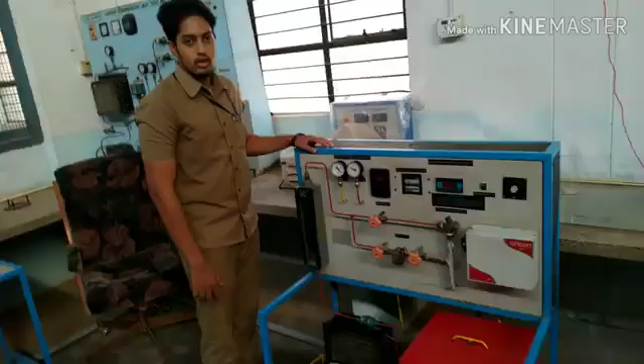Here from VIT College Mechanical Department, I am here to discuss the experiment: refrigeration test bed on vapor compression. Here are the parts of the experiment.

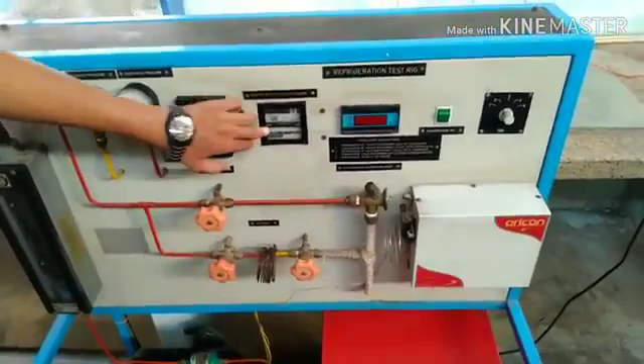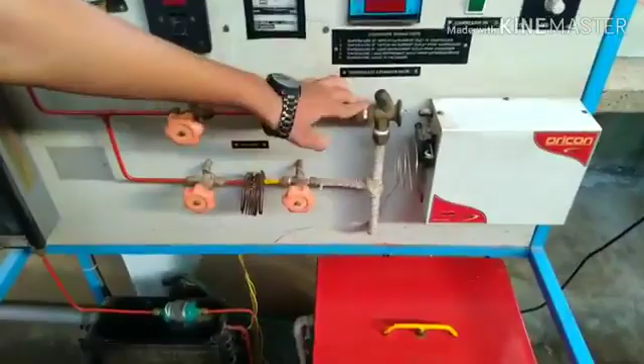Starting with this is the rotameter, and this is the suction pressure gauge, discharge pressure gauge, and this is the energy meter for the compressor. This is a temperature indicator, and this is the compressor valve, and this is the temperature knob, and this is the thermostatic expansion valve, and this is the capillary tube, and this is the condenser, and this is the compressor, and this is the evaporator.

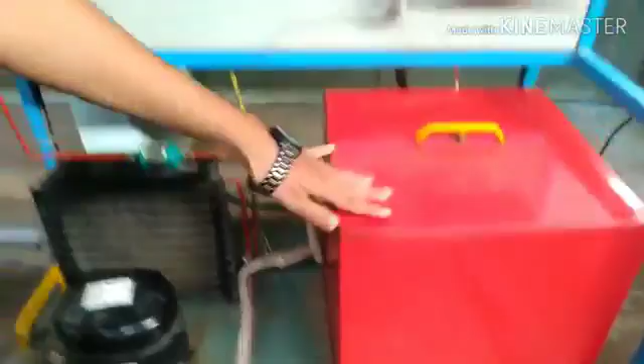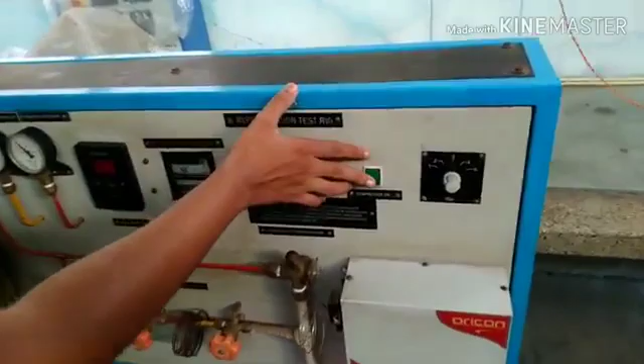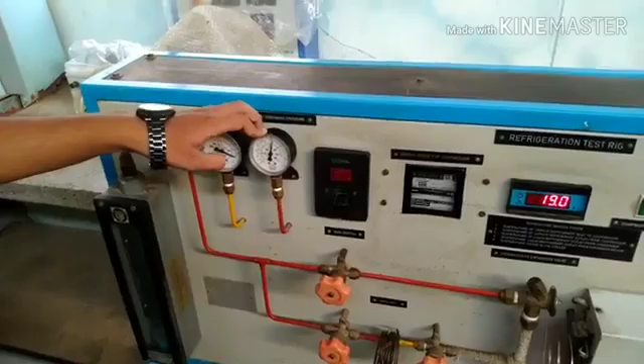Now I will be explaining the working principle of this experiment. First we need to switch on the switch, and then turn on the compressor valve, then wait for 15 minutes for the steady state to appear. Then take down the suction pressure gauge reading, the discharge pressure gauge reading, and the time taken for the energy meter to complete 10 revolutions. Then, turning the temperature knob, take down the temperatures till T1, T2, T3, T4 and T5.

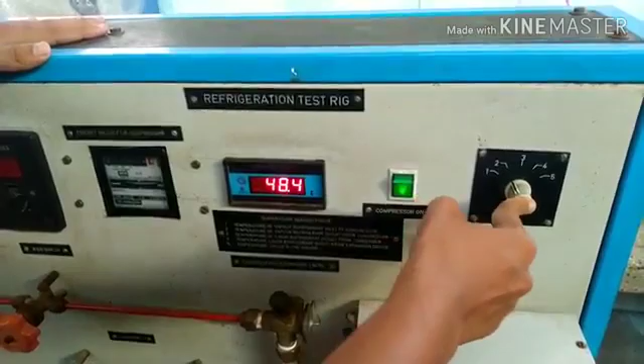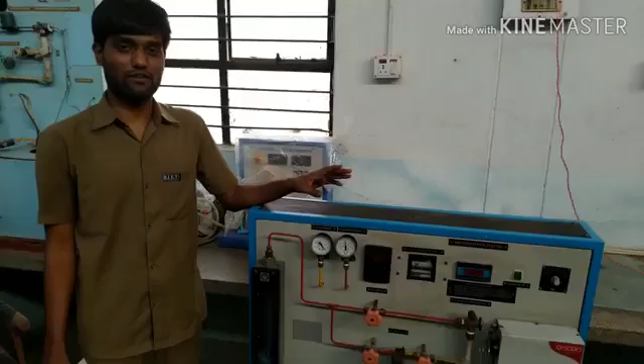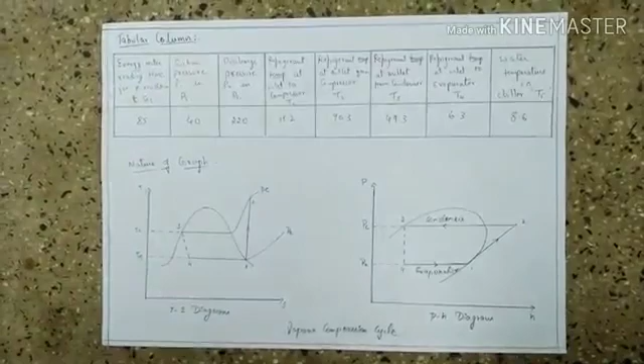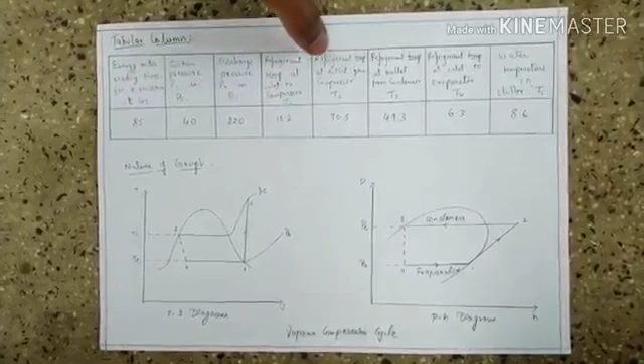So this is the tabular column. First, the energy meter reading time for 10 revolutions is equal to T seconds. Then this is the suction pressure P1 in PSI, and this is the discharge pressure P2 in PSI. Refrigerant temperature at inlet to compressor is taken as T1. Refrigerant temperature at outlet from compressor is taken as T2. Refrigerant temperature at outlet from condenser is taken as T3. Refrigerant temperature at inlet to evaporator is taken as T4. Water temperature in the chiller is taken as T5.

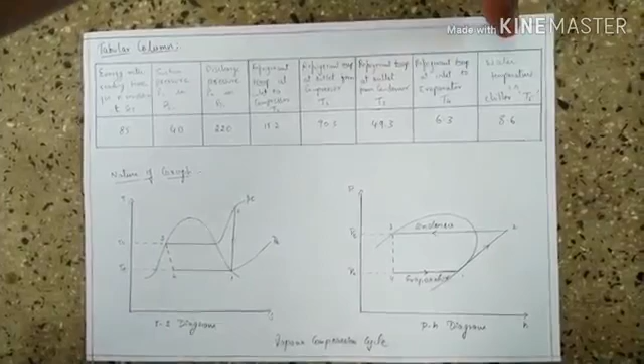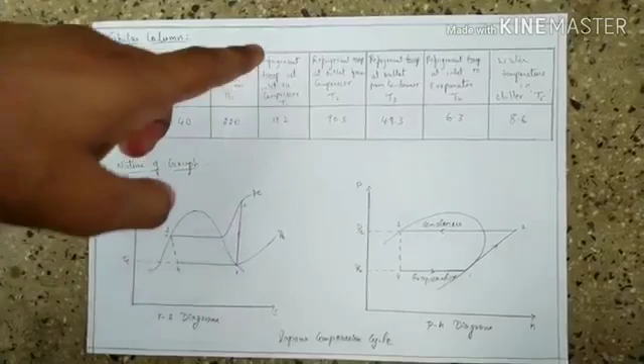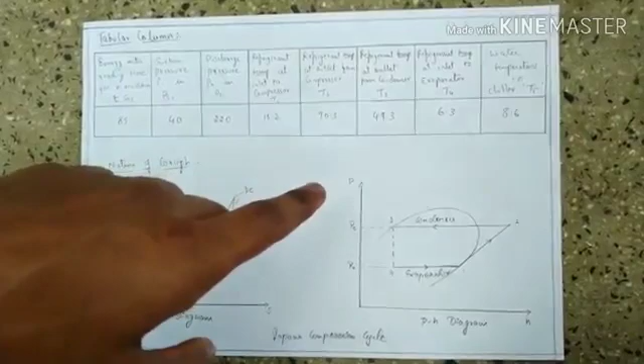So the time taken for 10 revolutions is 85 seconds, and the suction pressure is 40 psi. Discharge pressure is 220 psi. Refrigerant temperature at inlet to compressor, T1, is 15.2, and T2 is 90.3 degrees Celsius. T3 is 49.3, T4 is 6.3, and T5 is 8.6 degrees Celsius.

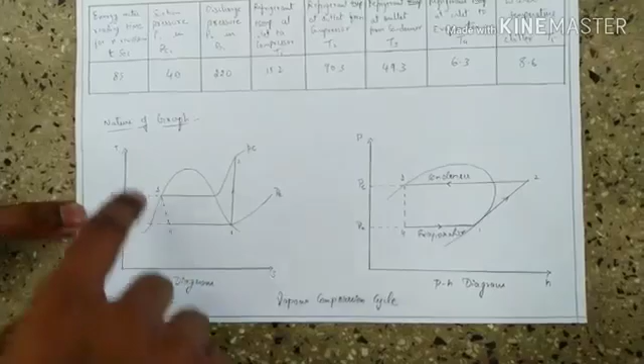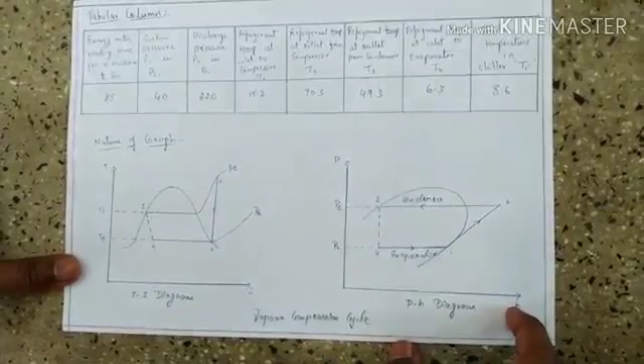Here we have the nature of the graph. This is the TS diagram, where y-axis is represented by T and x-axis is represented by S. This is the PH diagram, where y-axis is represented by P and x-axis is represented by H. Here this line gives the condenser temperature and pressure, and this is the evaporator.

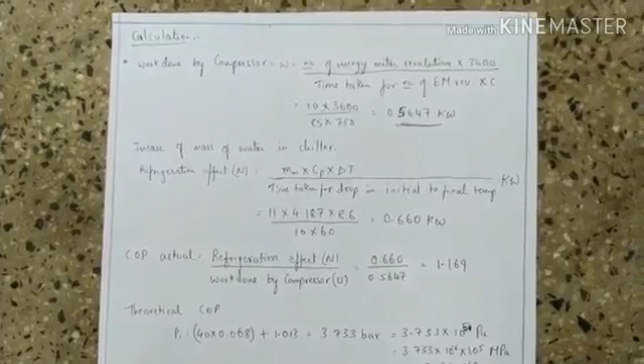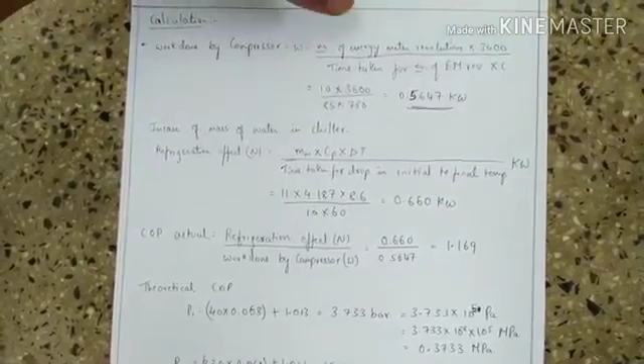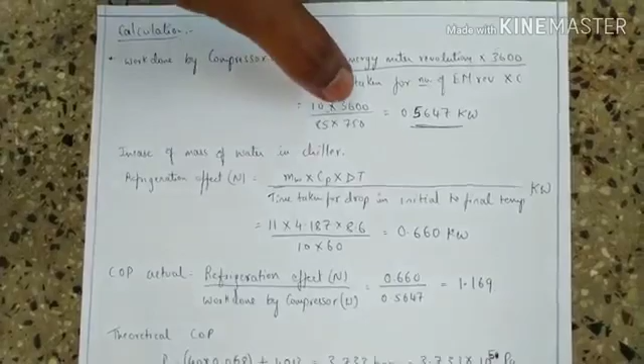Now coming to the work done by compressor, represented as W, equal to number of energy meter revolutions into 3600 divided by time taken for 10 revolutions of energy meter into C. The number of energy meter revolutions is 10, multiplied by 3600, whole divided by time taken for 10 revolutions, which is 85 seconds, and C value is 750. When we calculate this, we get 0.5647 kilowatts.

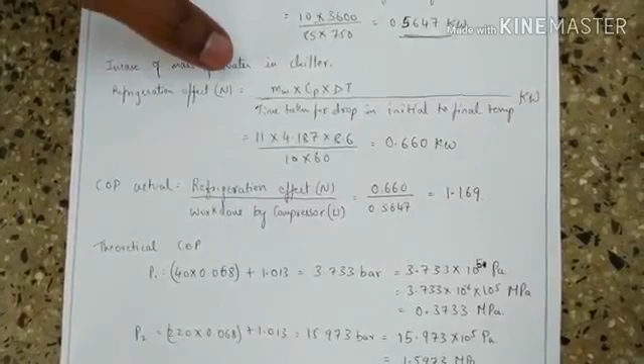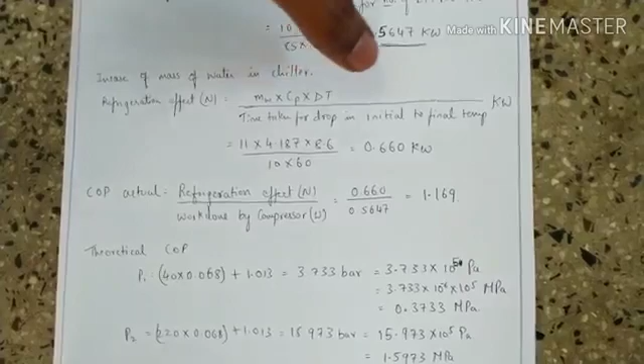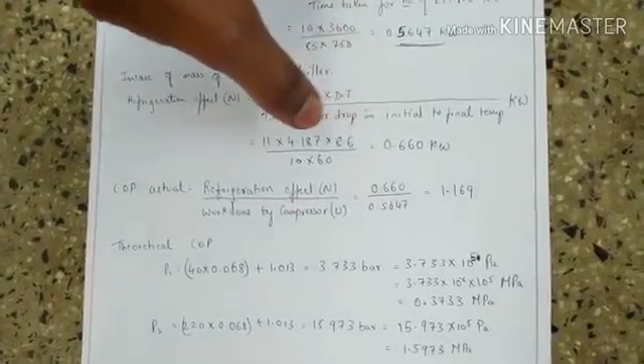Coming next, in case of mass of water in chiller, the refrigeration effect is represented by N, and the formula is MW (mass of water) into CP (specific heat) into delta T (temperature difference), whole divided by time taken for drop from initial to final temperature, with SI unit kilowatts. The values are MW 11 into CP 4.187 into delta T 8.6, whole divided by 10 into 60. When we calculate this, we get the final answer as 0.660 kilowatt.

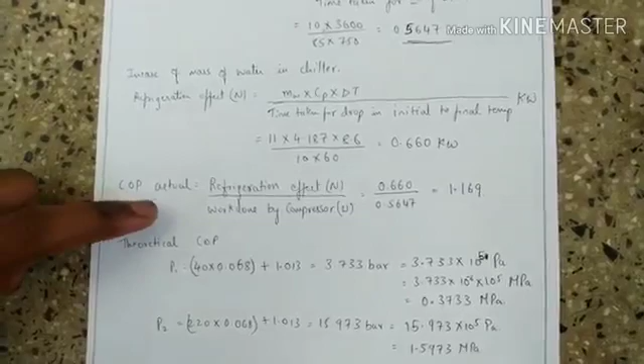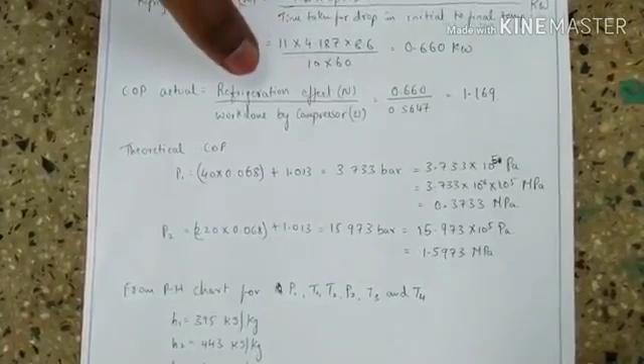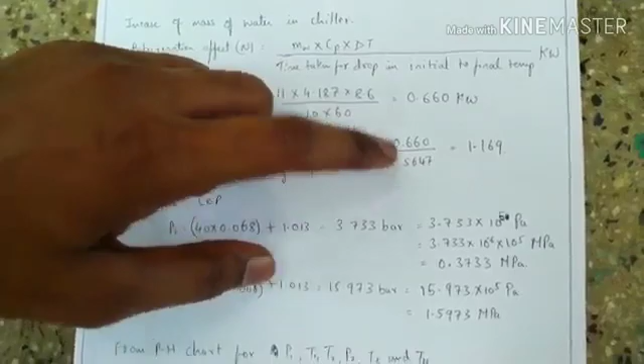Coming to the next part, COP actual, coefficient of performance, is calculated by using the formula: refrigeration effect, denoted by N, divided by work done by compressor, denoted by W. Here the refrigeration effect value is 0.660, divided by the compressor work value 0.5647. When we divide this, we get 1.169.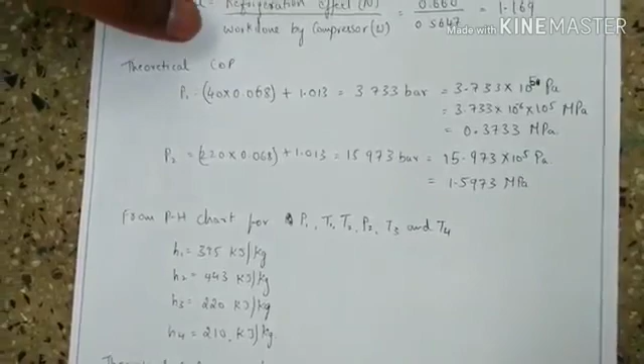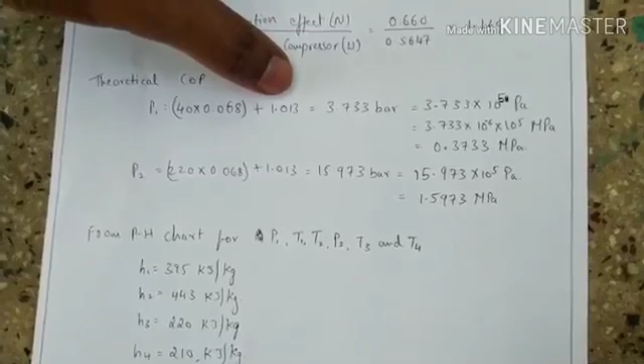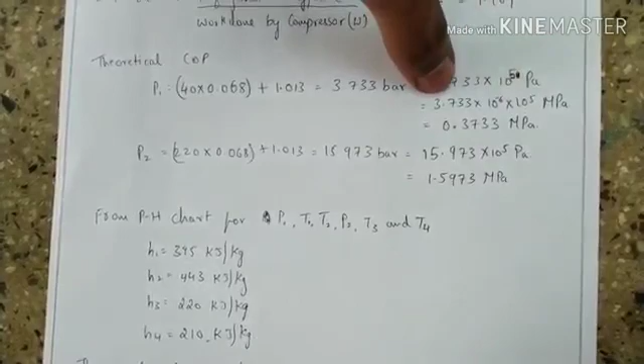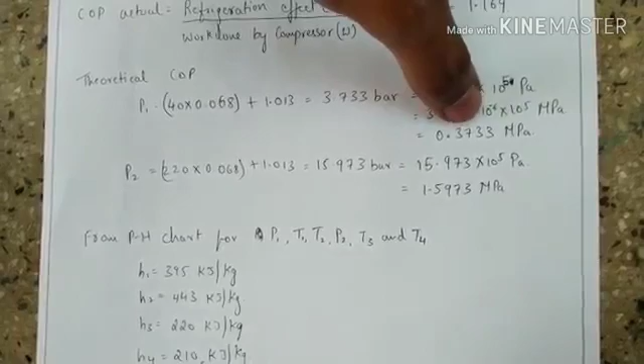Coming to the next part, theoretical COP, coefficient of performance calculated theoretically. Here we have P1, and pressure P1 multiplied by 0.068, and when added by 1.013, we get the pressure in bar, that is 3.733. Next we multiply by 10 to the power 5 to convert it into pascals, and again multiply by 10 to the power minus 6 so we get the unit in MPa. So the final answer we get is 0.3733 MPa. Coming to P2, the value is 220.

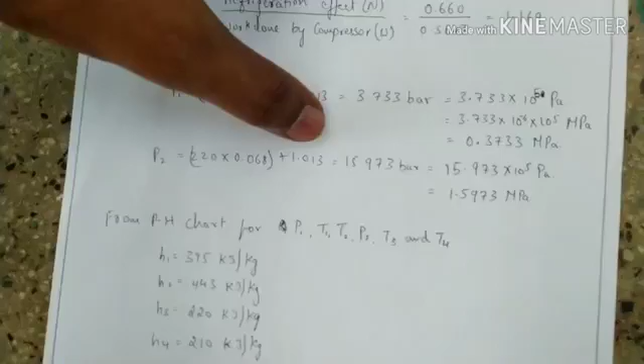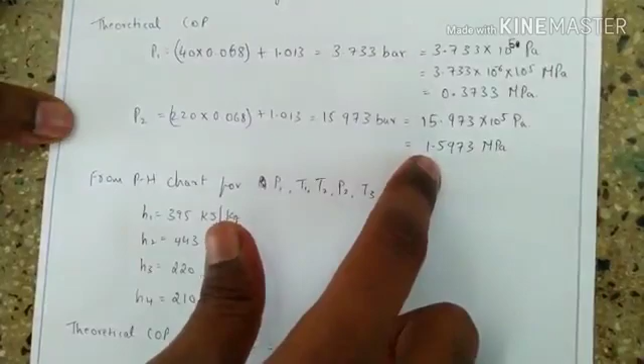You do the same thing again: multiply by 0.068 plus 1.013, you get 15.973 bar. Next, if you multiply by 10 to the power 5, you get it in pascals, and again multiply by 10 to the power minus 6, the final answer you get is 1.5973 MPa.

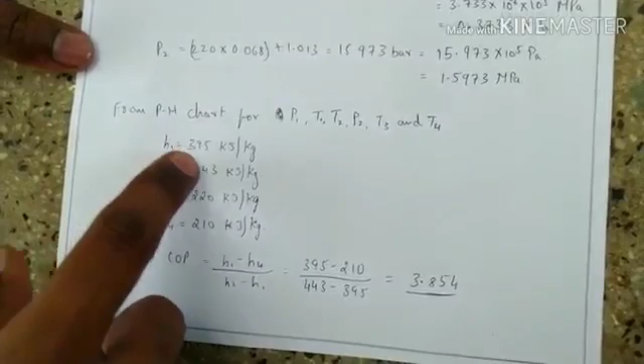Next, from the P-H chart, for P1, T1, T2, P2, T3 and T4, when we plot these values on the P-H graph, you get H1 equal to 395 kilojoule per kg, H2 equal to 443 kilojoule per kg, H3 equal to 220 kilojoule per kg, H4 equal to 210 kilojoule per kg.

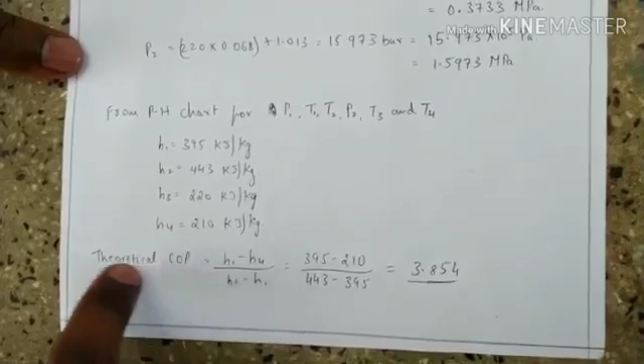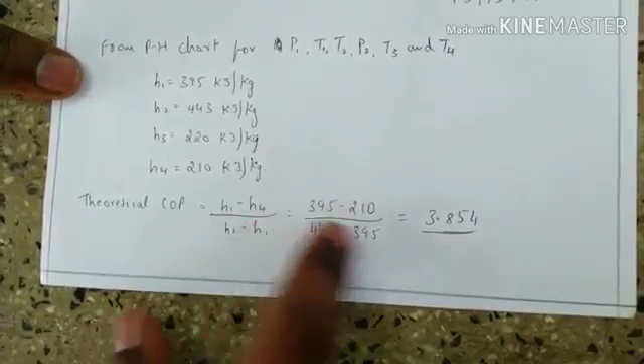Theoretical COP, theoretically calculating the coefficient of performance. The formula is H1 minus H4 divided by H2 minus H1, where H1 value 395 minus H4 210, whole divided by H2 value 443 minus H1 395. You get the final answer as 3.854.

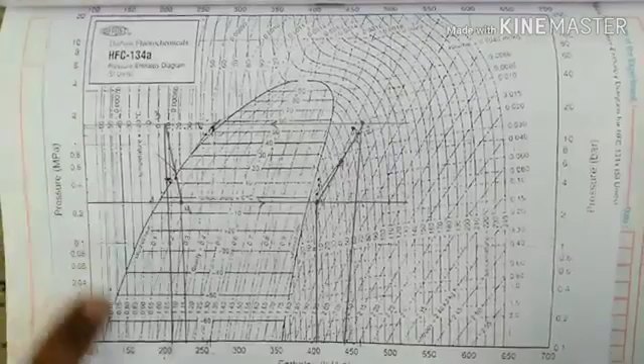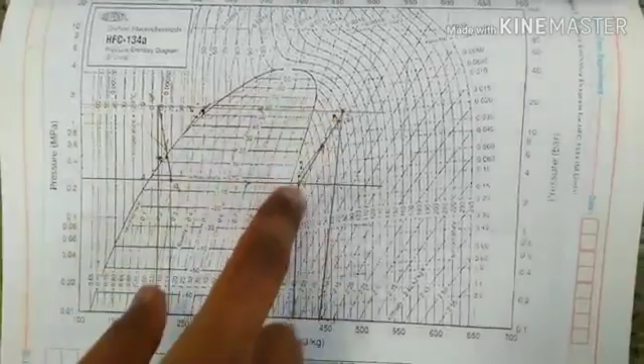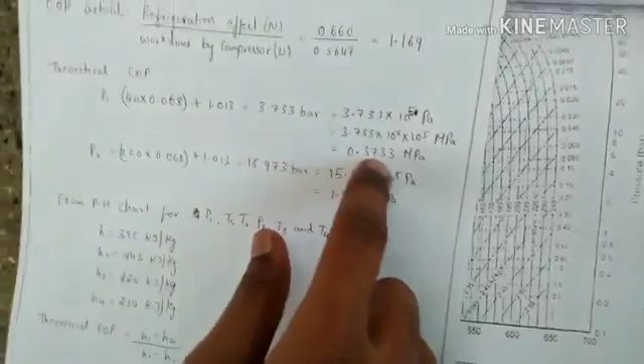So this is the P-H chart. Here are the values of pressure in SI unit, following with MPa, and this is the temperature, where we have to find T1, T2, T3 and T4. We plot it here, and this gives the enthalpy values of H1, H2, H3 and H4. So here we have pressure P1 value 0.3733 MPa and P2 value 1.5973 MPa, which we plot in the y direction.

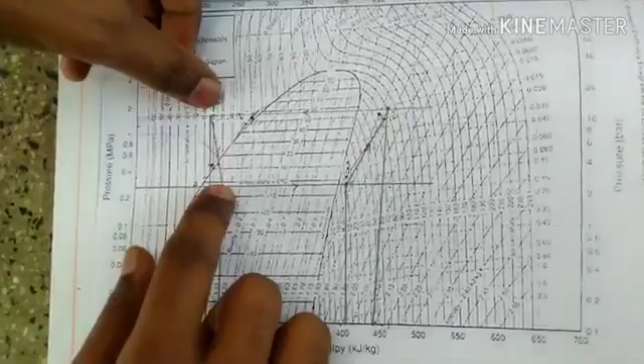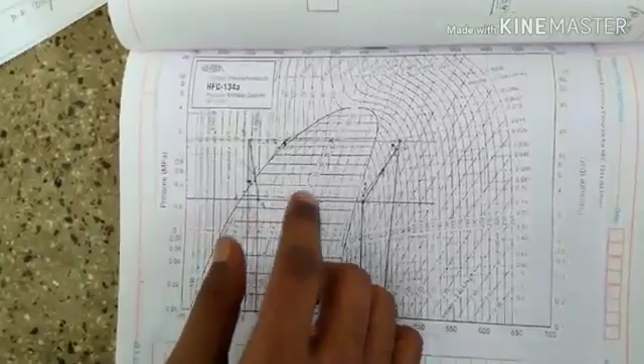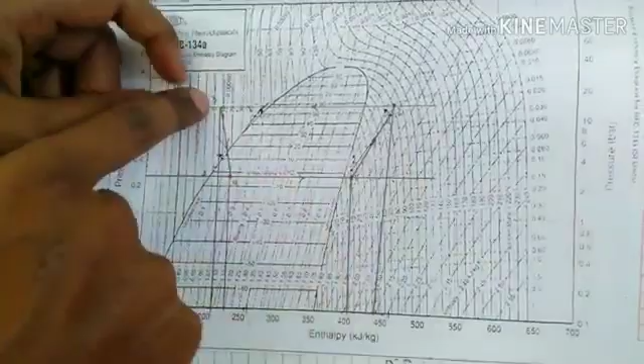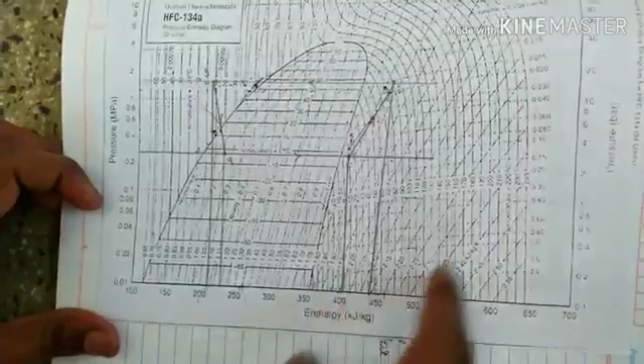So you get two values here, and then you take the temperature as T1 15.2, T2 90.3, T3 49.3 and T4 6.3. So the temperature you get here as T1, T2, T3, T4, forming a quadrilateral. Then you plot it downwards like this, and you get the four values, H1, H2, H3, H4. Using this way, you plot the P-H graph and get the values of enthalpy.